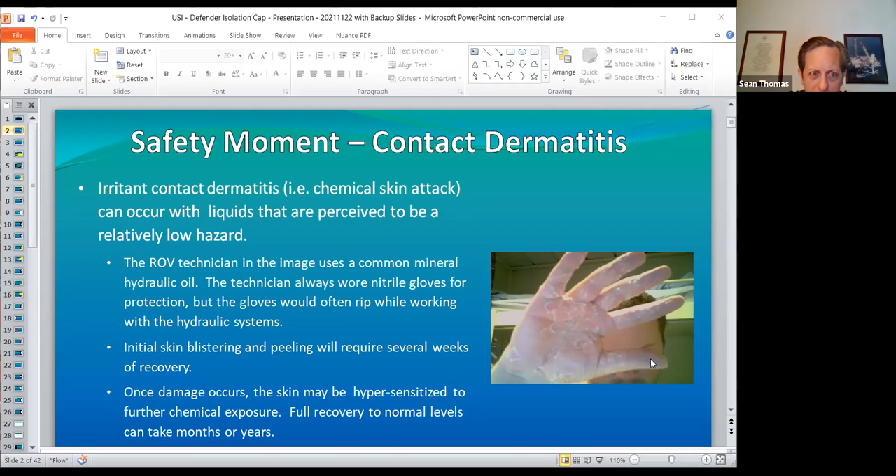I'm Sean Thomas, president and founder of Universal Subsea. I'm an inventor and engineer and designer, with dozens of successful products over my career, many of which are still in production or used today. I was at Chevron for 7 years as a subsea equipment expert, including 2 years as global subject matter expert for subsea wellheads. Before that, I was at Vetco Gray, now Baker Hughes, for 10 years, including 5 years as global product manager for subsea wellheads, and had a lot of influence on the MS700 and MS800 wellhead systems that are produced today. So if you've worked with any Baker Hughes wellhead systems, you've probably seen equipment that I've designed.

John? Yeah, I'm John Fitzgerald. I'm looking after business development for Universal Subsea. I spent a lot of time over in Asia. I worked with FMC for 23 years, and KBR Granherne for about 10 years, with lots of time also in the Middle East, the Emirates, Yemen, what have you. So I'm just happy to be here, with lots of experience running subsea wellheads and installing subsea trees offshore.

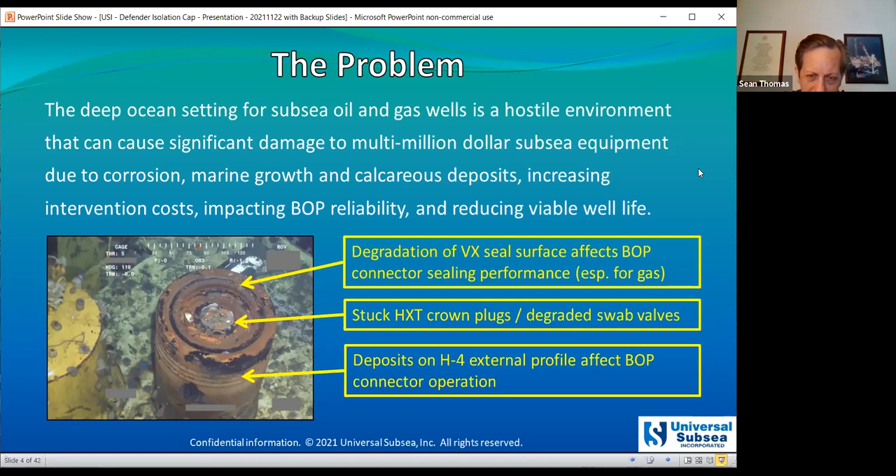So we can expect that the crown plugs would be difficult to remove, requiring a lot of cleaning initially, and then relatively high extraction forces. Similarly, for vertical trees, we generally expect that over the life of the tree, the performance of the swab valves will degrade significantly, especially for pressure testing performance.

So the solution we're here to talk about today is our Defender Subsea Isolation Cap and environmentally friendly Defender Stasis preservation fluids, which each prevent degradation of the critical sealing and locking surfaces of these multi-million-dollar wells. This also addresses a key issue for BOP reliability that we'll look at.

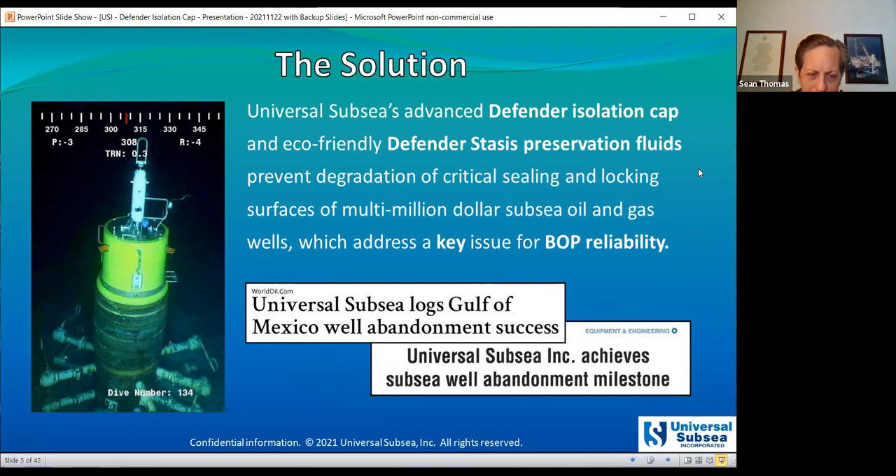Additionally, calcareous deposits are an issue. This is something that's not well understood, and we'll look at that in more detail. These are calcium and magnesium minerals that are electrolytically deposited by the cathodic protection system onto any bare metal surfaces, and that will occur in all water depths, deep water and shallow water.

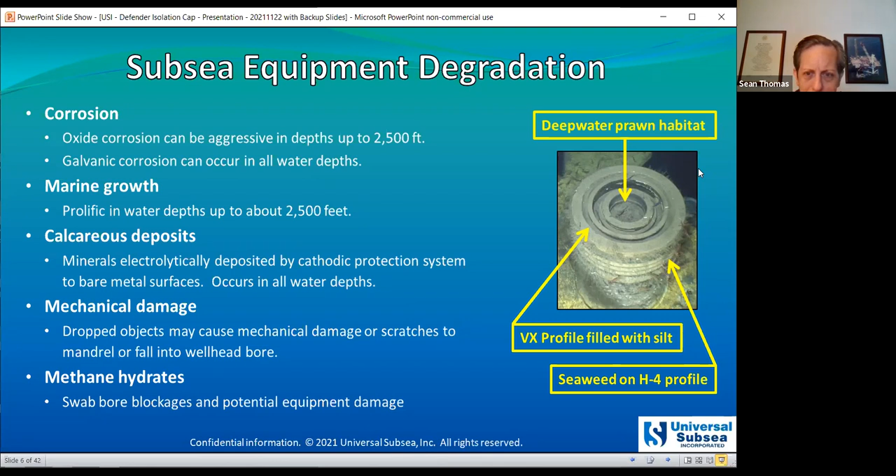Many of you will be familiar with cathodic protection systems. More than 90% of the CP systems used for offshore equipment are passive systems that use aluminum, zinc, indium alloy anodes. These prevent corrosion through sacrificial corrosion of the anode, creating an electrical circuit, so currents flow through the seawater from the anodes to the cathode, which is the material being protected.

This is an electrolytic deposition process, basically electroplating. These calcareous deposits that occur on uncoated steel surfaces act as a coating to prevent corrosion of the steel, and they substantially extend anode life. This phenomenon is necessary and beneficial on things like pipelines where coating has been removed, but on tightly toleranced interfaces or seal surfaces, calcareous deposits are highly undesirable. These can occur on any uncoated metal surface where you have seawater and are electrically coupled to the anodes.

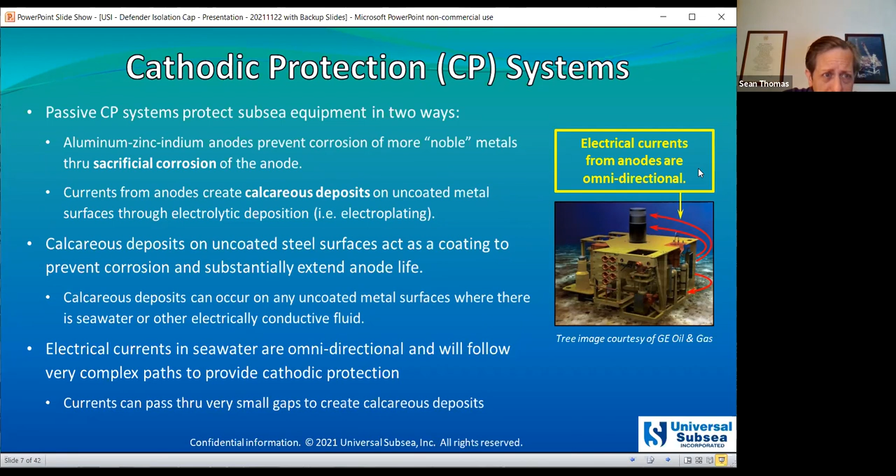Calcareous deposits are calcium and magnesium compounds, and they can occur on any uncoated metal surfaces, even inside cracks and crevices. Have any of you had experience with calcareous deposits in the field? They can be pretty tightly bonded and fairly hard, generally requiring aggressive scrubbing to remove. The problem is that scrubbing to remove calcareous deposits also removes base metal, which can affect manufacturing tolerances—important, as we'll see.

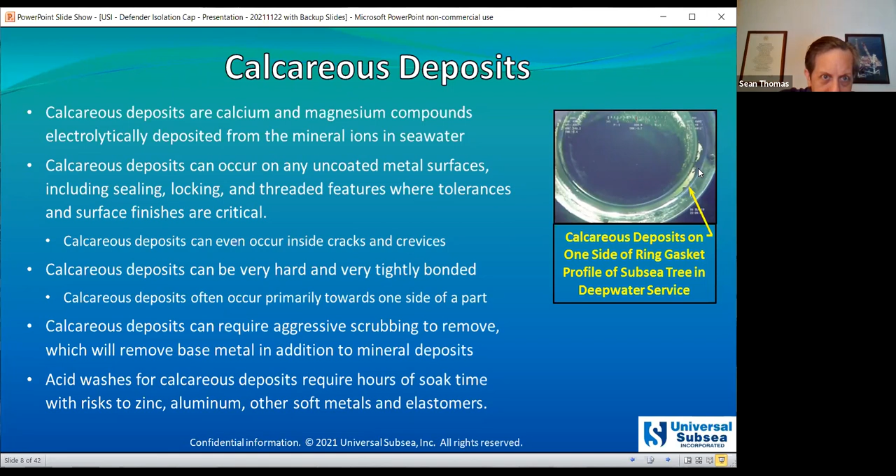Acid washes are another option to help dissolve the deposits, but those require hours of soak time and can attack zinc, aluminum, other soft metals, and elastomers, so you have to be careful with them. Back when I was at Vetco, for years we treated Inconel materials as immune to deterioration in seawater. We go from carbon steel to stainless steel to Inconel, moving in a trend that gives much better corrosion resistance, but there are other factors that affect general integrity of those surfaces, as we'll see.

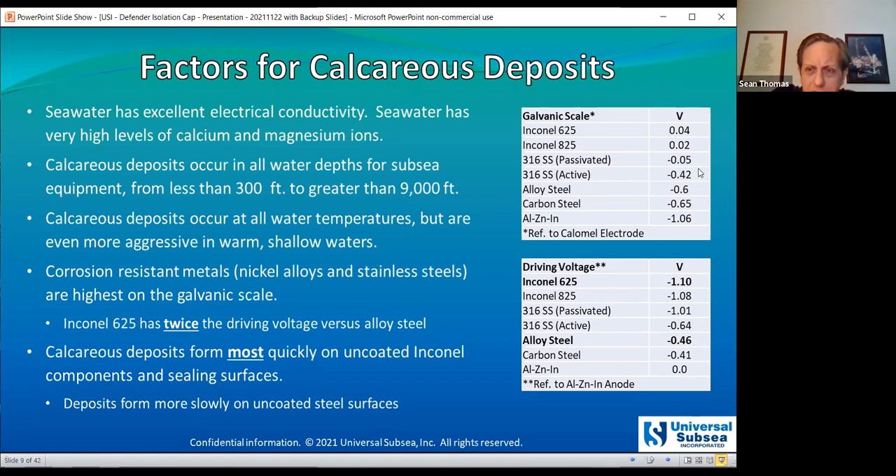The thing that led us into this business is our familiarity with wellhead and tree corrosion caps. These older caps, and even more recent ones, are rarely if ever actually designed or tested to contain internal pressure, to verify fluid injection, or to verify that you can retain the preservation fluid without leaks. Some of these caps have no seals at all, some have no locking system. The ones that do have body seals typically leak profusely during the fluid injection process. The locking systems tend to be fairly low-cost, and due to pressure during injection, that generates a pressure force inside the cap which causes the cap to lift up against the locking system—that's the phenomenon by which most of these caps end up with leaking seals.

The consequence of that is that very little preservation fluid is actually injected down into the wellhead bore.

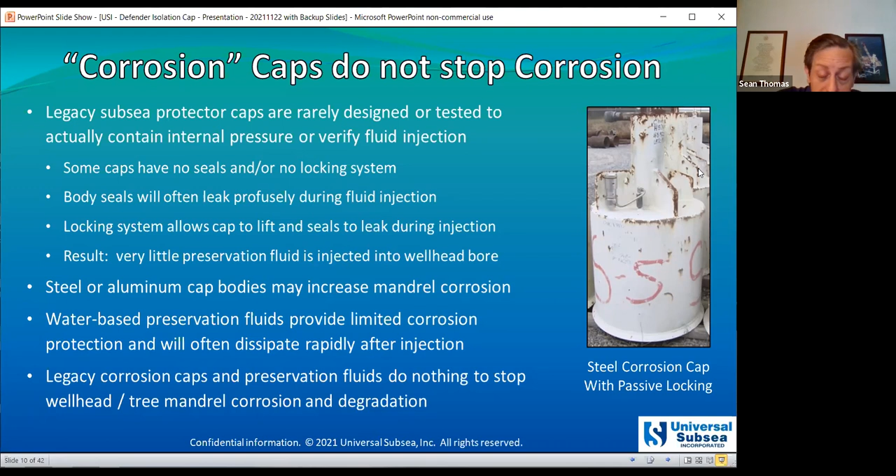Okay, so a quick overview of subsea equipment preservation fluids. Up until the introduction of the Defender stasis fluids, basically all the competing fluids are water-based. Typically water glycol, sometimes straight water without glycol. So subsea tree or subsea BOP control fluids are pretty commonly used. There's a couple of different water-based subsea wellhead preservation fluids that are used. Additionally, sometimes monoethylene glycol with oxygen scavenger is injected into a cap.

So the characteristics of the majority of these fluids are that they're heavier than seawater and water-based. They'll typically tend to sink in a well bore, and these fluids will instantly mix with water if there's any mild agitation. Being water-based, they're generally ineffective at actually displacing the seawater from inside a cap or the upper bore of the wellhead or tree. These fluids are also electrically conductive, so they won't act as a barrier to the electrical currents from the CP system. Many of these fluids contain volatile hydrocarbons that provide corrosion protection. Those hydrocarbons will dissipate pretty quickly, and there are known examples where the hydrocarbon additives attacked elastomers.

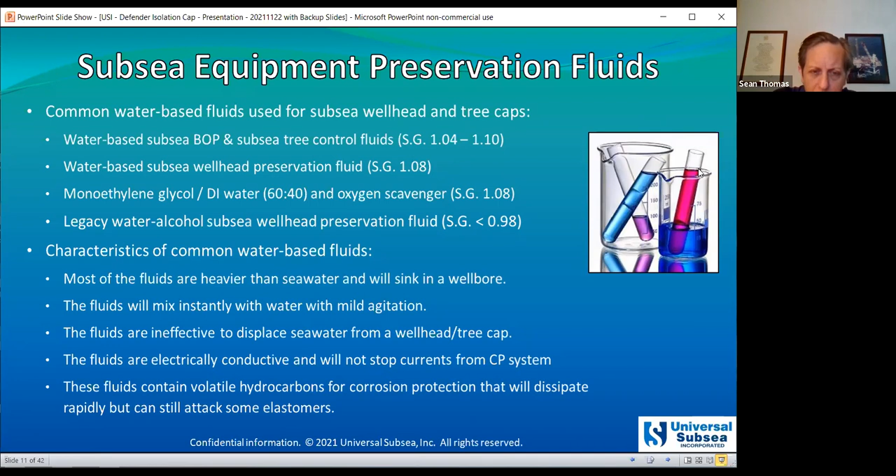Okay, so just an overview: these legacy caps and fluids provide minimal benefit. In most cases they will allow corrosion and calcareous deposits without any restraint on that. They just basically act as debris caps.

Now, another problem I touched on is a large number of these subsea trees will slowly leak or bubble gas from the tree mandrel. This even happens sometimes on subsea wellheads during the abandonment phase. So as we see in this picture here, the gas release got underneath that steel protector cap and floated it off the top of the wellhead, and then it flipped over. You can see the cap sitting there to the right next to the jumper connector hub, and so the mandrel is sitting there exposed to seawater.

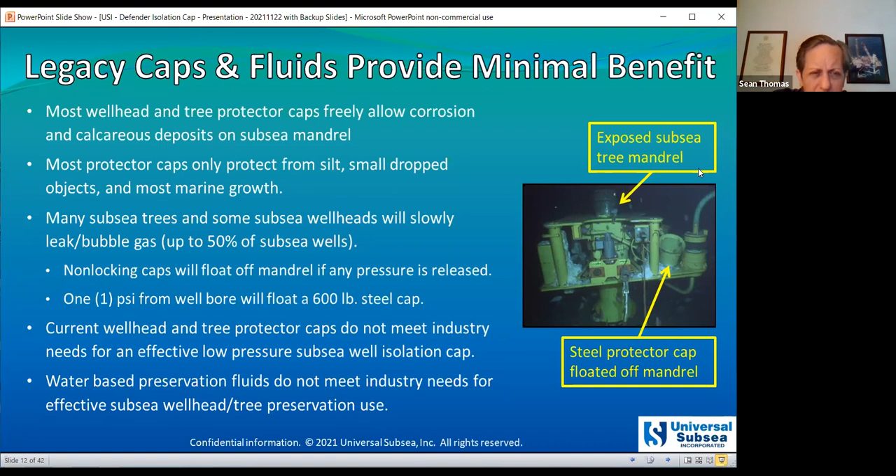Okay, so our background in manufacturing. I used to be product manager for Vetco Gray over the subsea wellhead product line. I had final technical authority for the corporation for managing the wellhead product line, as well as reliability.

Certainly coming from that background, we're familiar with the manufacturing tolerances for the external connector profile. They're very tight. The profile and surface finish for the sealing surfaces is extremely tight. To get a gas tight seal with an all metal ring gasket, that gasket profile has to be almost in perfect condition. Any scratches, any tolerance problems, particularly if the ring gasket profile is out of round even a little bit, will typically cause significant problems with gas tight sealing.

So in some cases operators will use a ring gasket with elastomer inserts, but we caution against use of those because the seal grooves on those ring gaskets can actually increase the scratching of the ring gasket profile. They're okay to use once, but you generally don't want to use an emergency gasket repeatedly over the course of the well. You really want to reserve those for emergency use rather than routine use.

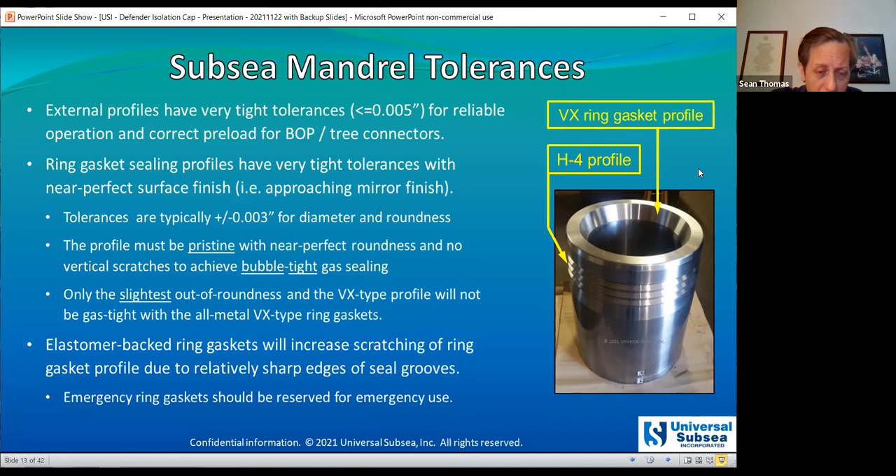So the current practices in the industry to address degradation of the sealing surfaces and deposits on the H4 profile are scrubbing tools. Now we're focusing on the ring gasket cleaning tools here. The majority of these tools don't have any centralization to the equipment mandrel, so you don't get uniform contact between the scrubbing tool and the VX or AX ring gasket surface.

And these tools do remove metal from the surfaces. They will remove base metal, the inlay metal, and really significantly, you cannot maintain any factory type tolerances with these types of tools. The more often they're used, the more out of tolerance the ring gasket surface will get.

We've heard many field reports of these scrubbing jobs lasting more than 30 minutes, up to 2 hours, up to 8 hours. And there's one field report where they scrubbed on one tree for an entire week. And of course, the damage is cumulative. So for the subsea tree especially, you'll have multiple interventions over the well life. You really want to minimize how much scrubbing you do on that gasket profile.

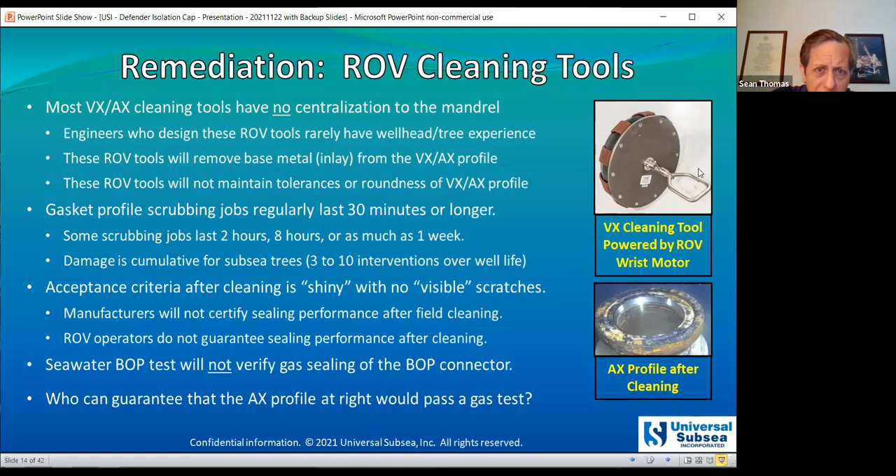Even more significant, we should mention that a seawater test will not verify gas sealing performance for this type of connection, particularly with the standard ring gaskets. And gas sealing integrity is much more difficult to achieve than drip-tight liquid sealing. So this exposes the industry to unnecessary risk, as opposed to the alternative of trying to minimize the degradation of the interfaces over the well life, which is what we're getting into here.

Since the Macondo incident, there's been numerous changes to drilling and production operations to reduce risk. However, at the connection at the bottom of the BOP stack, we haven't seen much change with regard to risks there. It's still the same practices the industry's used for decades. They'll do a seawater test when the riser's connected, then mud tests after that. There's no way to verify gas sealing performance. That creates significant risks to the industry of a gas leak below the BOP connector.

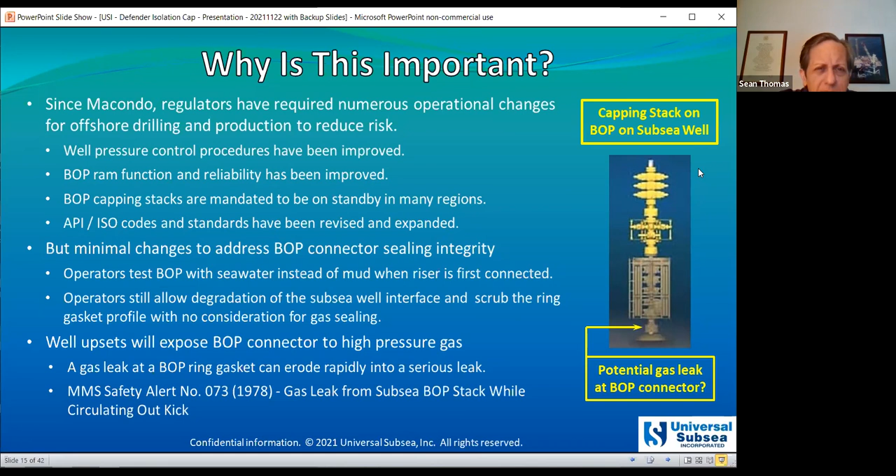So, technology to protect the subsea equipment mandrels. We need effective barrier seals, a corrosion-proof protector cap body, which is obviously preferred to a metal body that will corrode and deteriorate over time. It's also very beneficial to use a non-electrolytic, non-electrically conductive preservation fluid that acts as a barrier to the cathodic protection system and also provides very long-lasting preservation. So with this system, we have both the isolation cap and the preservation fluid acting to isolate the ring gasket profile, mandrel bore, and external H4 profile from the CP environment and the subsea environment. With this solution, this will halt all corrosion, calcareous deposits, and marine growth to the protected interfaces.

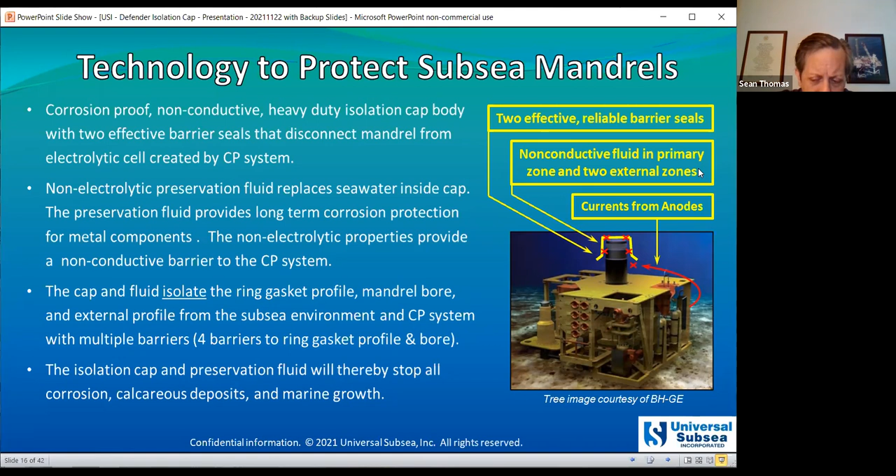Okay, so here's an image of our Defender subsea isolation cap. This is the first ROV-installable subsea wellhead protector cap that actually seals and isolates the well interface from the marine environment and the CP system. We use a plastic body, thick wall, high performance plastic, because it's very long lasting material with no corrosion or degradation. These caps will last many years, even decades, in the subsea environment.

Additionally, we have a special sealing configuration that isolates both the ring gasket profile and the external H4 profile. We've developed special body seals that allow us to get effective low pressure sealing while providing very low installation force, to make ROV installation and removal of the cap feasible. With conventional seals, the squeeze force is just way too high to get the cap installed and removed with the modest amount of force available with the ROV.

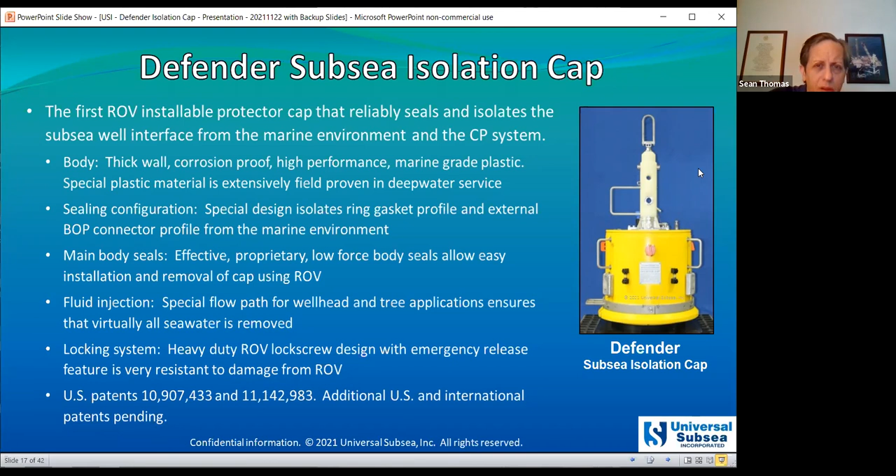Okay, so the locking system here is we use a heavy-duty ROV lock screw. It's designed to be resistant to corrosion, galling, and jamming, and it's also sealed to contain internal fluids. Highly resistant to damage from the ROV. It locks positively into a groove of the H4 profile, so it cannot slip under external loads or internal pressure.

It's a tolerance controlled design. You cannot over travel the lock screw. It has positive stops in both directions and a very high torque capacity also. You don't have to count turns to avoid damage because an ROV really cannot easily damage one of these lock screw mechanisms.

So this design is tolerance controlled. When we engage the lock screw, it actually pulls the cap down slightly and creates a controlled squeeze for the primary seal of the cap, which is the face seal at the top of the wellhead mandrel in that photo. And again, we get very high torque capacity with this design, more than 300 foot-pounds in the makeup direction, more than 150 foot-pounds in the retract direction, very high bending capacity, in addition to this emergency release feature.

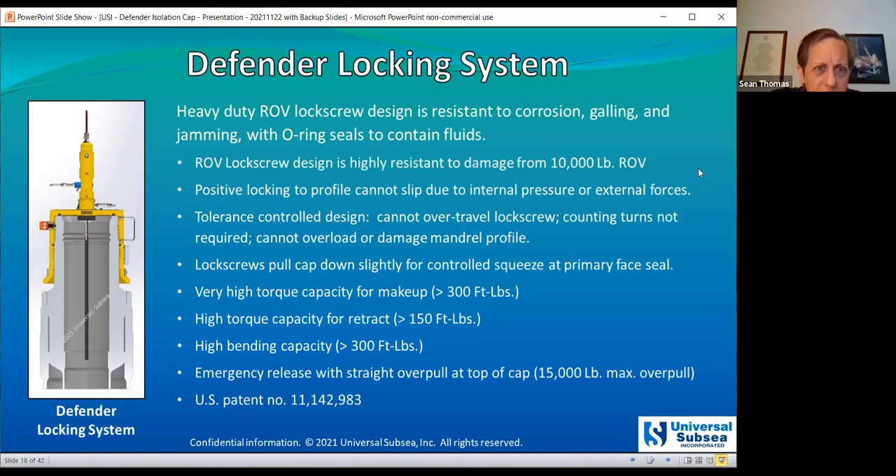Okay, so this shows our flow path for wellhead application, wellhead defender fluid injection. Part of this flow path is pretty well known in the industry, and part of it, the outer portion, the internal portion of the flow path has been used for many years by most of the equipment manufacturers.

What sets us apart is we have this primary chamber internal to the wellhead mandrel. We have a second chamber for the VX zone. When the fluid returns exit the hose at the bottom of the cap, we re-inject into the zones outside the mandrel, filling that secondary chamber with preservation fluid. Then we exit the secondary chamber, re-inject a third time, and fill the annulus below the secondary seal. This is one of our patented features, this particular flow path.

And it's kind of tricky to get the preservation fluid in, get all the seawater out, and get a really uniform injection of preservation fluid.

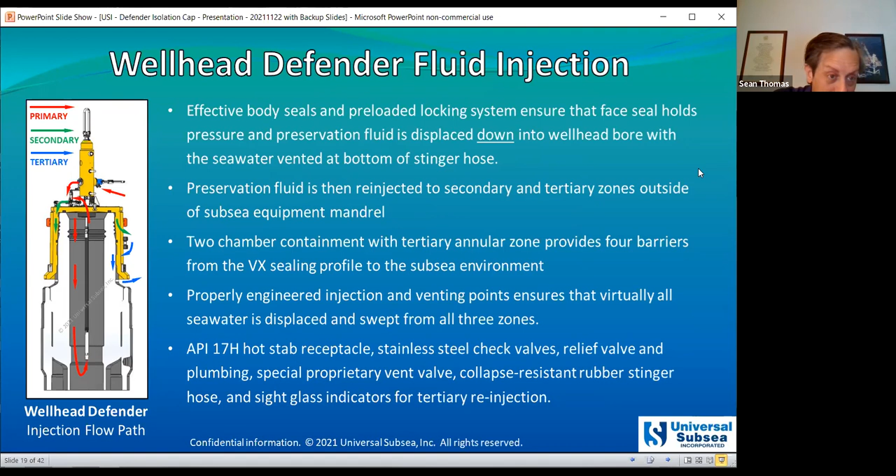We use a lightweight fluid for this application, and the lightweight fluid floats at the top of the wellbore, and it floats within the cap as well and displaces seawater downwards. With the tree defender, our innovation here is we have designed the cap to use a high density fluid on the internal bore of the tree mandrel.

So the red arrows there we see for the primary flow path, we're injecting high density preservation fluid. And then once that's done, we shift to the second port of the hot stab receptacle, and we inject lightweight fluid into the external, the secondary chamber and what we call the tertiary annulus. That is the two zones on the outside of the mandrel.

And this provides the most effective system to displace seawater from the tree mandrel internally and externally, and create fully protected zones with the preservation fluid.

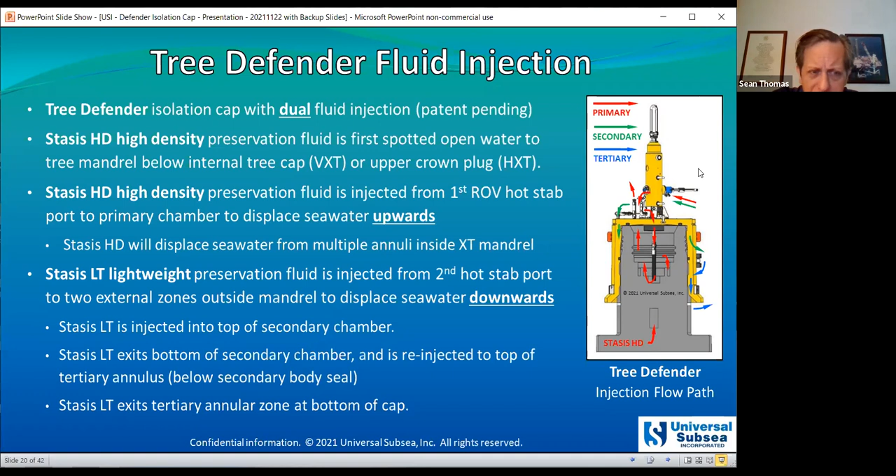Okay, so our primary focus with the Defender product line has been 27-inch mandrels. Obviously, 27-inch H4 is the most common tree and wellhead mandrel globally. We have designs for other mandrels, 27-inch DX, various 30-inch mandrels. We have a design for the OneSubsea DWHC. We have a design for the TechnipFMC EVDT tree, which is this tall cap we see to the right. And this technology can be adapted to basically any mandrel or hub design, as long as we adjust the body size to suit the correct mandrel diameters.

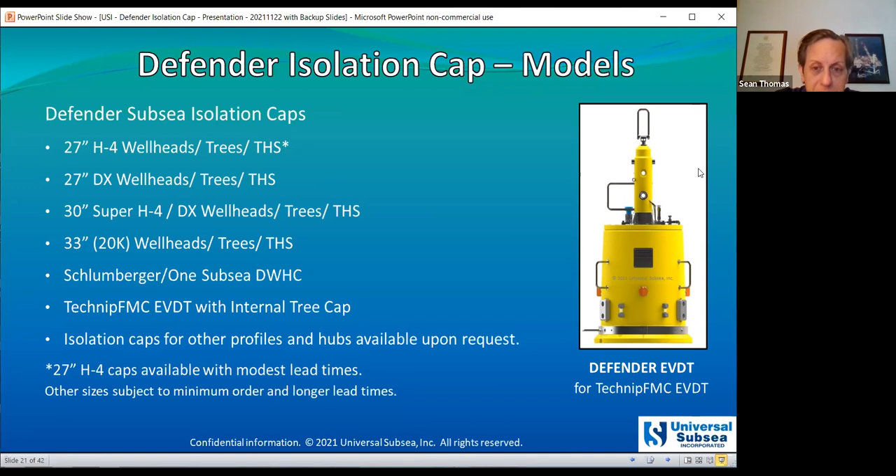Okay, so our stasis preservation fluids, we just were not really satisfied with the commercially available wellhead preservation fluids. They didn't last very long. We talked about that, they don't last very long. They have toxic hydrocarbons in them, and they're not effective for being able to displace seawater as well.

So our initial preservation fluid is our Defender Stasis LT. This is the first vegetable oil-based preservation fluid developed for the offshore industry. It's the first oil-based preservation fluid of any type approved for direct release to sea. This is a low viscosity, lightweight fluid, it floats in seawater, it's buoyant in seawater. And so if you inject it into a cap or any kind of closed chamber, in the seawater environment it will displace the seawater downwards.

We also have a lower cost Defender Stasis ST, slightly higher viscosity, and it can be used in this subsea environment and additionally for topsides equipment preservation and running tool preservation. It's also a bio-based product using natural and modified vegetable oils.

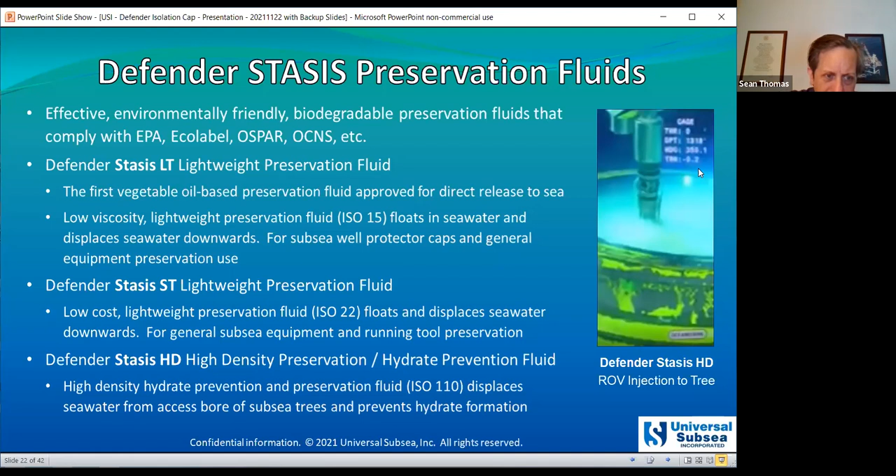Our third fluid in the Stasis family is our Defender Stasis HD, high density preservation and hydrate prevention fluid. We'll look at a couple of these in more detail.

The Stasis LT has a specific gravity of 0.93. It's the first non-aqueous preservation fluid, classified as a subsea wellhead preservation fluid under US regulatory requirements, approved for direct release to sea at subsea oil and gas facilities. It's formulated from natural and modified vegetable oils.

It's completely insoluble in seawater and other aqueous fluids. So if you inject it into a cap, it will never mix or blend with any seawater or water-based control fluids or brines — it's only soluble in other oils. In the seawater environment, it's extremely effective as a corrosion inhibitor and will completely displace any and all seawater from the protected zones.

Additionally, it's environmentally non-toxic, biodegradable, non-bioaccumulating, and non-sheen forming. These vegetable fluids are very interesting — they have a naturally high polarity, which creates a van der Waals effect that causes them to be attracted to steel and plastic surfaces, providing excellent water displacement properties.

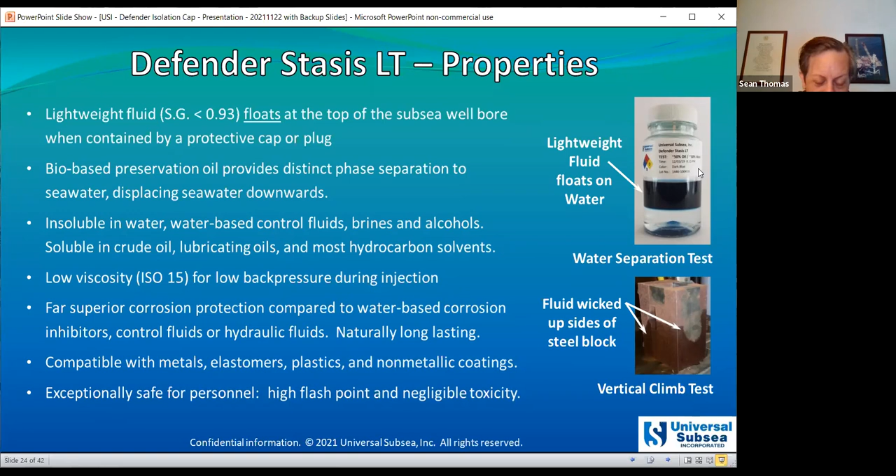Being bio-based, they're just much more friendly to humans and aquatic life as well.

Our Defender Stasis HD is a high density fluid with a specific gravity of slightly over 1.14. We developed this fluid to remove seawater from closed cavities subsea, such as the access bore or bowl at the top of a subsea tree, tubing head, or manifold. This high density fluid sinks in seawater to the bottom and pushes the seawater upwards.

It's environmentally non-toxic, non-bioaccumulating, and non-sheen forming. It is dielectric in the virgin state, and even with seawater contamination, has very limited electrical conductivity compared to seawater. While any of the Stasis fluids will prevent methane hydrates, we developed this fluid specifically to evacuate seawater from the access bore of the tree so we can create a completely non-aqueous, oil-filled environment in the access bore, and prevent methane hydrates by dewatering the access bore.

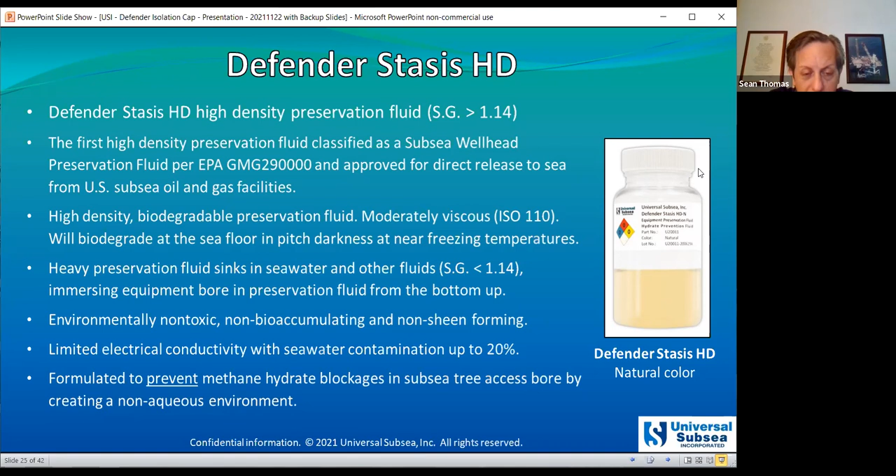Similar to this test, we can inject the fluid into a subsea tree just by holding a hot stab over the top of the access bore. This fluid will displace and sweep virtually any fluid that is soluble in water, including water, seawater, water-based control fluids, ethylene glycols, alcohols, and monovalent brines.

This next part is kind of unusual — again, the Stasis HD is a biodegradable oil, but it will also displace and sweep crude oil and refined lubricating oils.

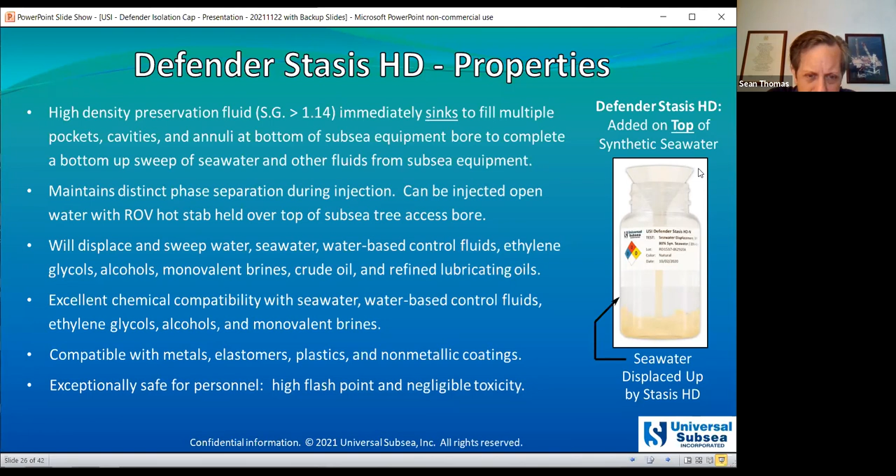The fluid has excellent chemical compatibility with seawater control fluids, glycols, and brines, so you don't see significant precipitants. It's compatible with all commonly used metals, elastomers, and plastics, and non-metallic coatings for subsea equipment. Similar to the Stasis LT, it's very safe for personnel, with a high flash point and negligible toxicity.

For operators, there's a significant value proposition — looking at different opportunities to save money and reduce cleaning costs for subsea wells during construction. For the subsea tree mandrel, we have reduced cleaning costs for every intervention, and for a 12 to 15-year tree life, operators typically see at least 5 interventions over that tree life, so the savings add up.

Other benefits include reduced risk of leaking BOP ring gaskets, reduced risk of leaking crown plugs or swab valves, and elimination of hydrate blockages during subsea tree workovers.

By maintaining crown plugs in good condition, the operator would be able to use a light intervention vessel instead of a heavy drilling rig. So looking at those cost saving opportunities, in the majority of cases, that will easily pay for the additional cost of the slightly more expensive protector cap.

Furthermore, by maintaining the subsea tree, and specifically the subsea well interface, in good condition, we can expect that operators can extend the life of some subsea trees by at least 2 to 3 years. That will mean millions of dollars in additional revenue for the operator, and obviously pay for the cap many times over in that case.

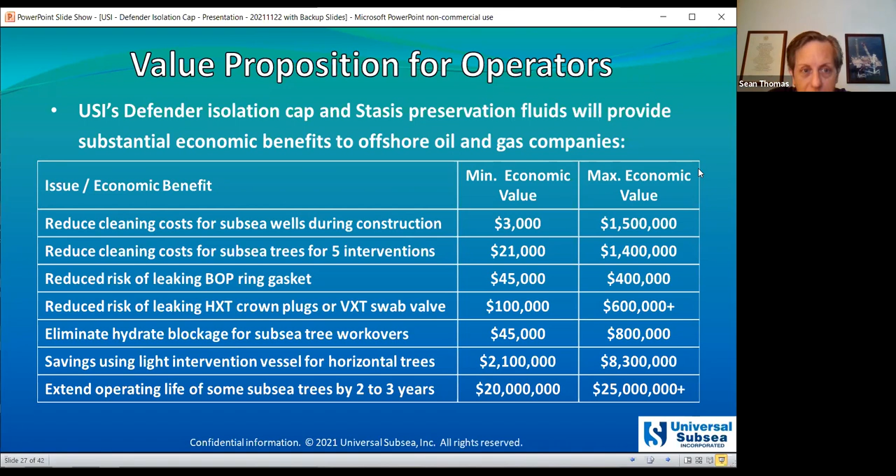Looking at environmental and safety issues, there's a lot of focus on carbon emissions, and eliminating this cleaning and maintenance of the well interface, we see reduced carbon emissions there. Similarly, eliminating hydrate remediation reduces discharge of methanol during hydrate remediation activities, and reduces risk of methanol injection equipment on the rig deck.

Based on feedback from some of our customers, we can expect substantially reduced risk of methane leaks from the crown plugs, access valves, and swab valves, and similarly reduce the amount of methane that does leak. It also significantly reduces the risk of a leaking BOP connector ring gasket, which will maintain well integrity, and reduces, though it's already a very low risk, the risk of a loss of well integrity below the BOP stack.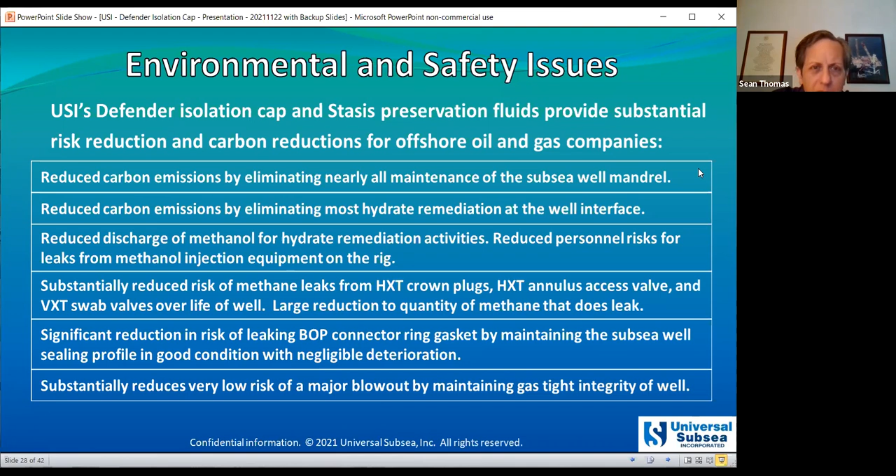Any questions? So some of our customers and approvers, among other things, our Stasis HD has been reviewed by TechnipFMC and approved for use in the top of their trees.

This is a really remarkable property of this fluid, that you can literally just pour it into the top of a tree, tubing head, or manifold access bore, and it will displace all of the seawater from that access bore. It doesn't matter what's at the bottom, this fluid will fill most equipment regardless of the shape, going from one annulus to the next annulus. So we'll sweep, in most cases, at least 98 to 99% of the seawater from the access bore of the equipment.

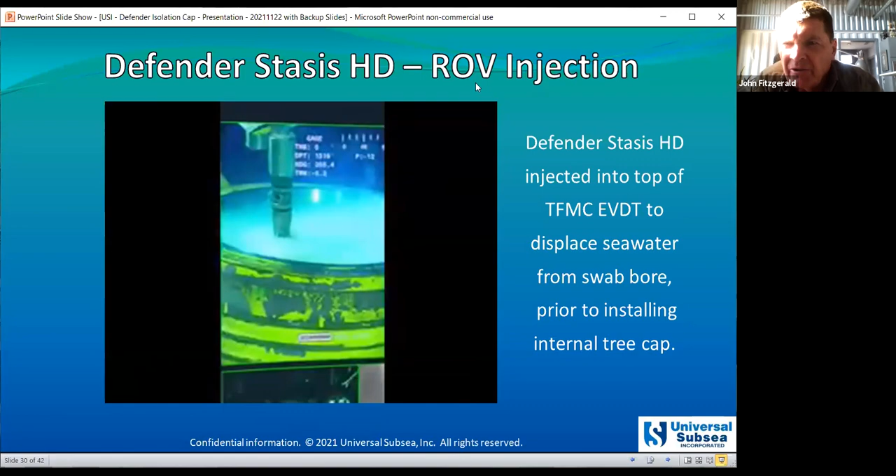Can you guys see that at all? We only have a couple of minutes left, so we wanted to see if there were any questions from participants, or if they wanted to comment on the issues we're addressing. Maybe they have some personal experience with these calcareous deposits, or in Egypt there's a lot of gas production offshore, perhaps they've seen some of these hydrate formations. We understand that folks are having issues with tree bore hydrate blockages in places like deepwater Brazil, Angola, and certainly in the Gulf of Mexico it's a recurring problem. Anybody? Anything?

Any questions, guys? Any thoughts? Usam, are you there? Yeah, I'm still here. Okay, waiting for any questions.

Well, you're one of the fabulous Baker men, so have you run into any of these issues? I know you're working on the control side, but have you had to be out there with the ROV scrubbing away on the top of the tree or the wellhead?

Yeah, I haven't been exposed personally to anything, but I heard a couple of years ago about one damaged wellhead that failed some testing. So I think something like this would have managed to avoid this problem.